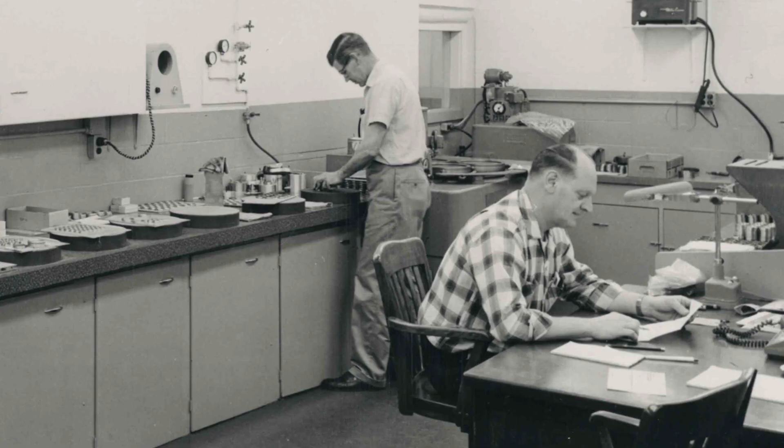Discovery. It defines who we are. It's where we came from and where we're going. At MagSeal, discovery is in our DNA. Since 1954, MagSeal has been a leading expert helping engineers solve complex, high-speed, high-vibration, and high-altitude sealing challenges. MagSeal's world-class performance seals are trusted on some of the world's most demanding military and commercial platforms.

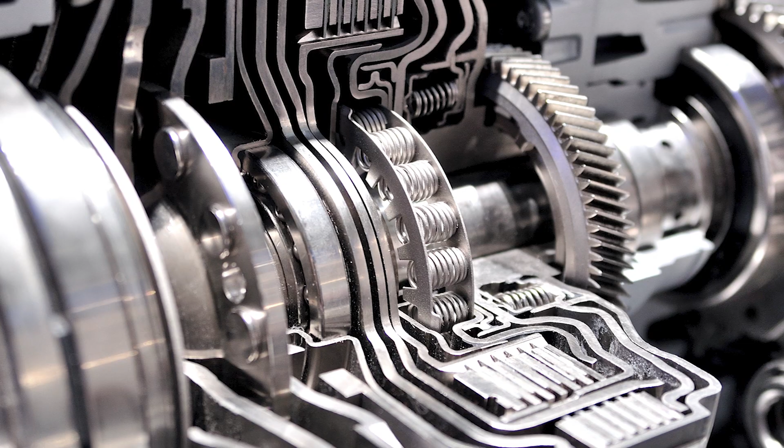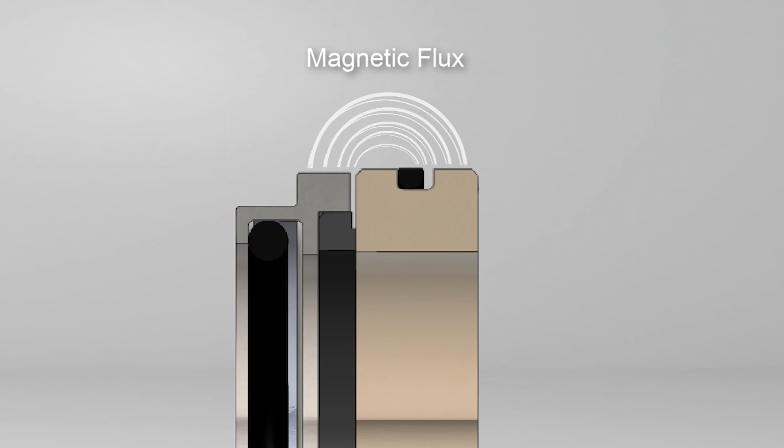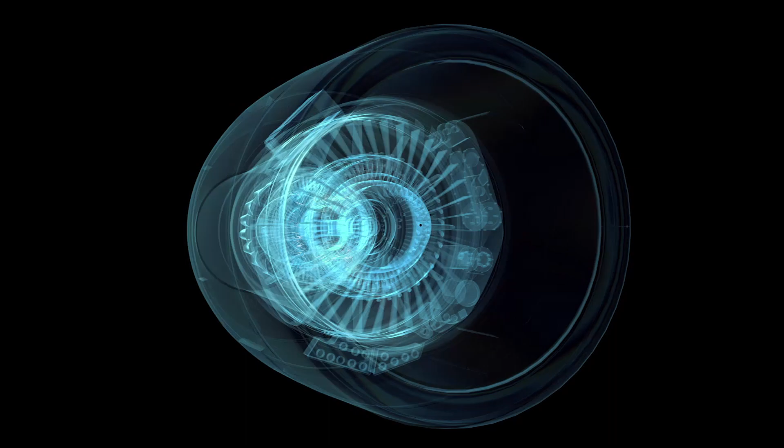Our founders discovered that by applying magnetics in mechanical sealing assemblies, unit loading could be reduced and made more uniform, requiring less mass and valuable space than other sealing methods. By replacing springs with magnets, leaks caused by hysteresis, uneven loading, and resonance are eliminated. Conventional seals compensate for these challenges with higher loading, which increases power-sapping parasitic torque. MagSeals require minimal loading and provide low breakaway and running torque, allowing more power to the shaft with less losses.

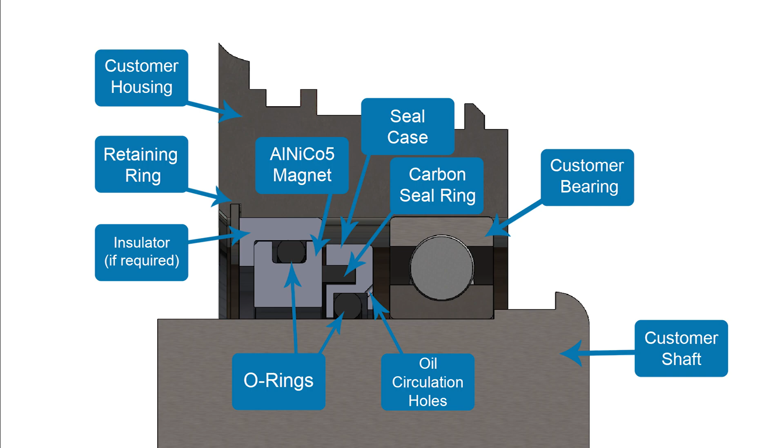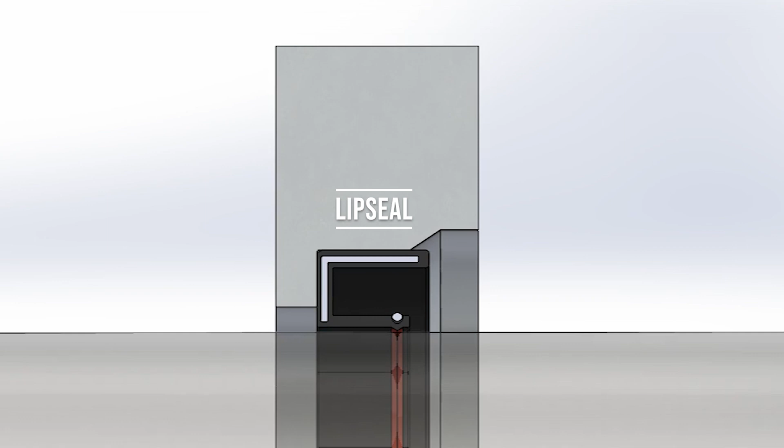As sealing experts, we understand that space along a shaft is usually limited. That's why MagSeals are engineered to fit into tiny spaces. MagSeals are ideal for replacing lip seals because they utilize durable, long-life carbon graphite seal rings and eliminate shaft wear caused by lip seals. There's no need to suffer with an underperforming seal in your application. Let us design a better sealing solution that fits right into your existing cavity. All of our seals are customizable.

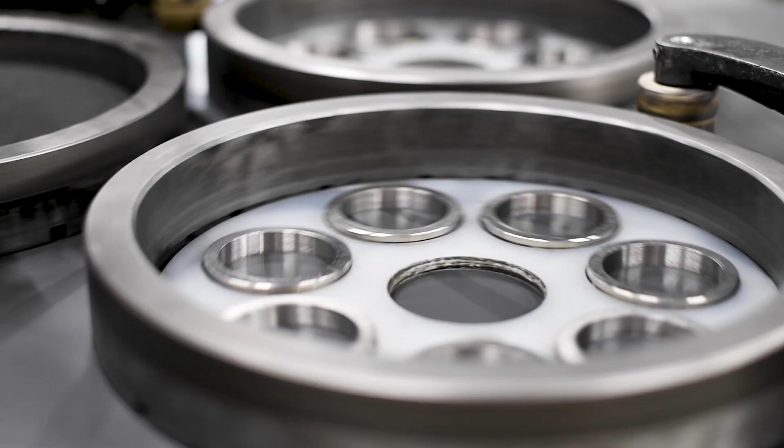As innovators are discovering new ways to power aviation systems, the need for high-performance, high-reliability seals has never been greater. With advancements in aviation technology requiring increased energy density, extended range, reduced noise, increased thrust, and higher speeds, traditional components that contribute to system drag won't meet the needs. The latest innovations in mechanical bearing technology must be paired with the very best in mechanical sealing technology.

As a leading sealing solutions expert, MagSeal is your best option. Through the application of magnetics and decades of experience, let MagSeal reduce drag, provide longer life, reduce noise, reduce mass, and improve reliability in your critical sealing application.

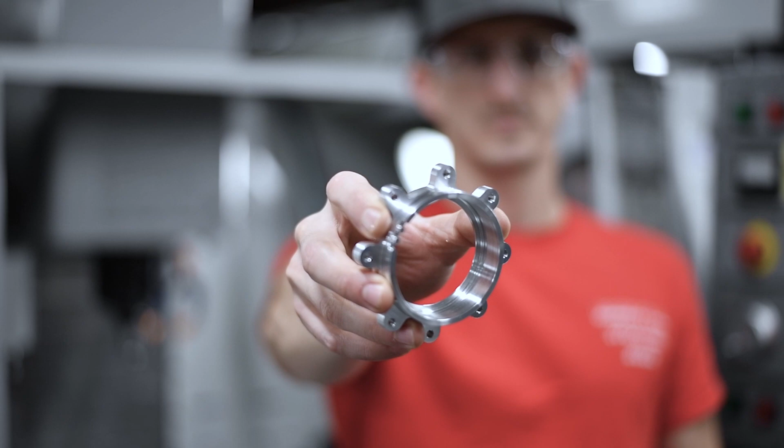As discovery and innovation ushers us into the age of faster speeds, longer range, and higher performance, we'll play an essential role in the revolution. Join us.